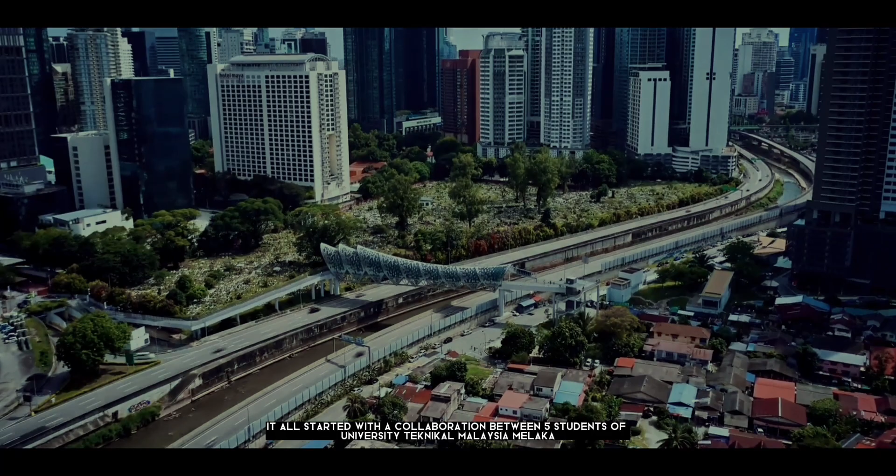This is TANKD Steel Industries, one of Malaysia's biggest group of companies. TANKD Steel Industries are located strategically at Bangsar, Kuala Lumpur, Malaysia. It all started with collaboration between 5 students of University Teknikal Malaysia Melaka who had dreamed of their own company

after completing a PhD in electronic engineering overseas. Thus was formed TANKD Industries, which comes from the names of the students Tanesh, Azmina, Nazan, Khairatul and Dirshan. All of them now are Malaysia's top 10 engineers handling skyscraper projects.

TANKD Steel Industries had a remarkable period of continuing expansion accomplished by a rapid development in Malaysia with collaboration with biggest companies such as Tenaga Nasional Berhad, Top Glove Corporation, Petronas Global, Vibranium Wakanda and many more.

Welcome to TANKD Steel Industries, one of the biggest group of companies. I am Dirshan, TANKD's company manager, and now I would like to introduce my colleagues. First of all is Ms. Wan Noor Azmina, our executive director. Mr. Tanesh is our research engineer. Ms. Khairatul Afika is our material engineer, and finally Mr. Nazan is our technical officer.

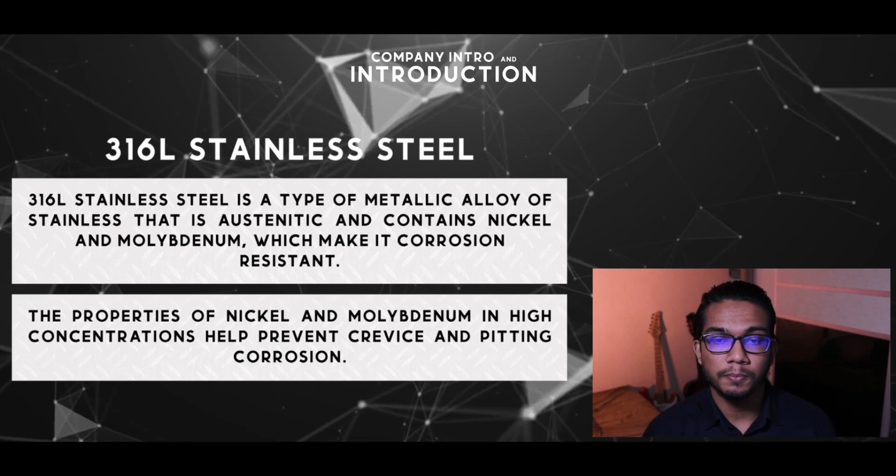Today I'm going to talk a little bit about 316L stainless steel. 316L stainless steel is a type of metallic alloy of stainless that is austenitic and contains nickel and molybdenum, which makes it corrosion resistant. The properties of nickel and molybdenum in high concentration help prevent crevice and pitting corrosion.

316L stainless steel is also very durable and resistant to chemical contaminants and acid solutions such as bromides, sulfuric acid and chlorides. Thus, the role of this stainless steel in the Petronas Twin Tower is to further improve its corrosion resistance, heat resisting properties and formability. Also, it provides a shiny look and strength and fatigue strength to the tower.

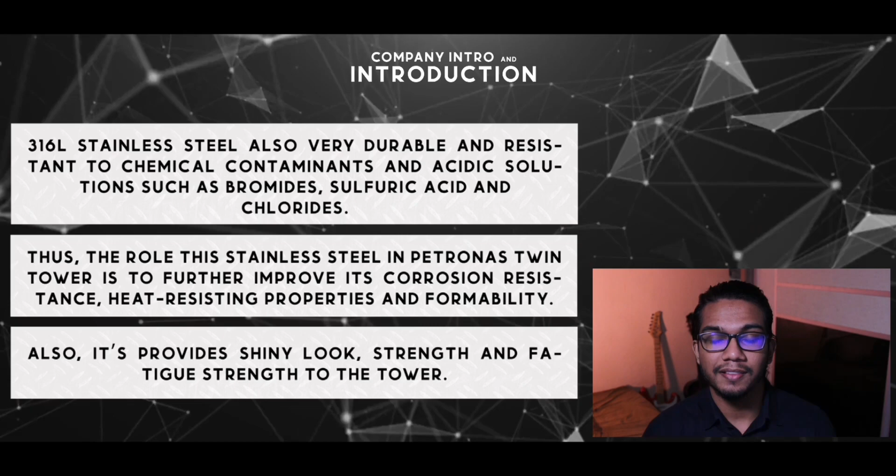Assalamualaikum and hi, my name is Wan Noor Azmina and my position in TANKD Steel Industries is Executive Director. We have 3 objectives. The first one is to provide a better understanding on the properties of the selected 316L stainless steel grade raw material.

We also want to propose better and enhanced mechanical properties of 316L stainless steel for structural application. And we also want to present the technical findings obtained from our company in order to convince the client about the proposal that we make.

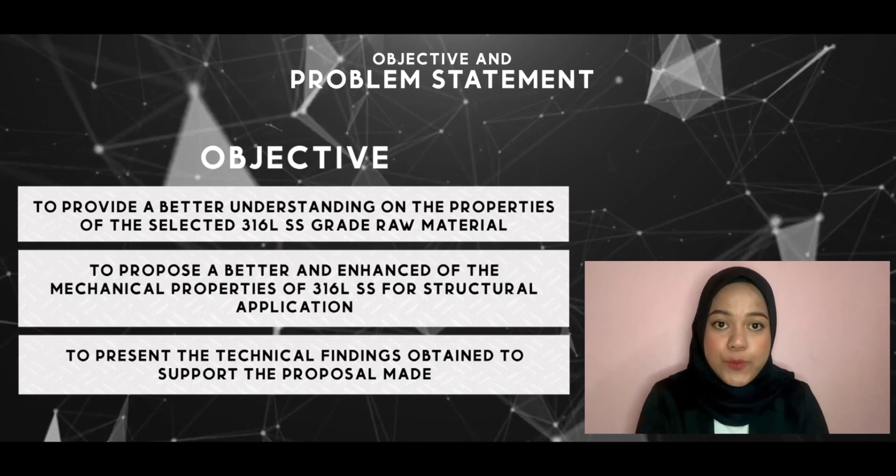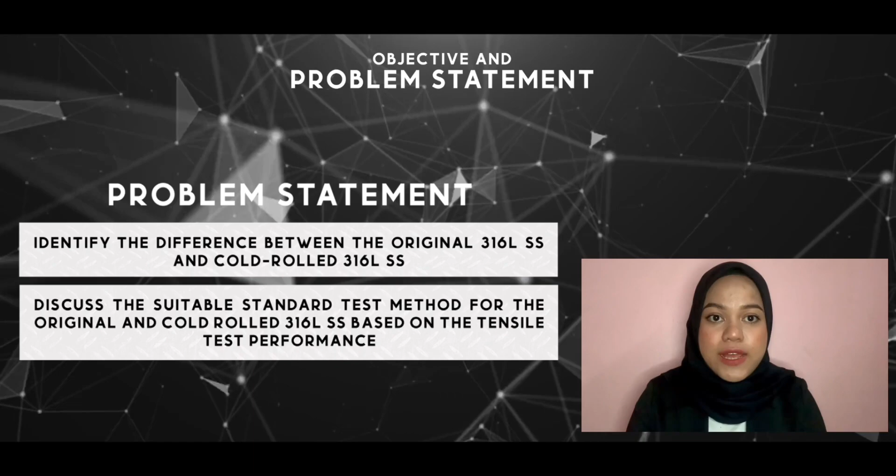Next is the problem statement. We have 2 problem statements. The first one is to identify the difference between the original 316L stainless steel and cold-rolled 316L stainless steel. We also want to discuss the suitable standard test method for the original and cold-rolled 316L stainless steel based on the tensile test performance.

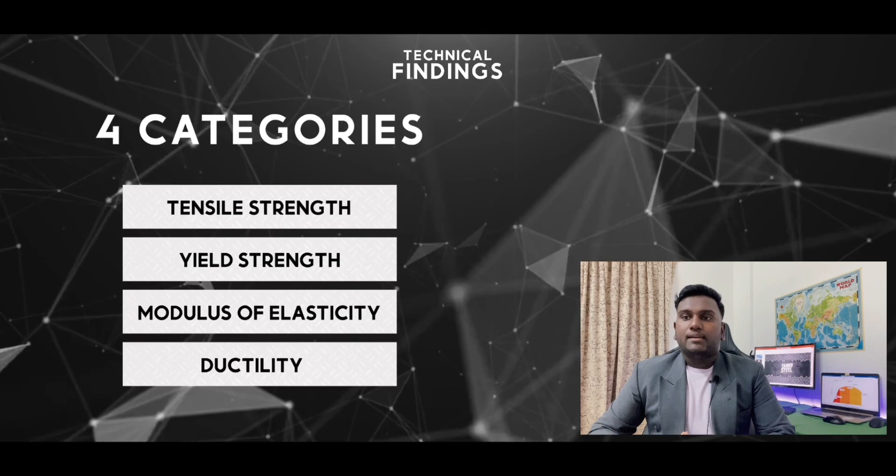Hi, my name is Tanesh Murugan and my position in TANKD Industries is research engineer. For the technical finding, we have 4 categories: tensile strength, yield strength, modulus of elasticity and ductility. Tensile strength is the amount of load or stress that can be handled by a material before it stretches and breaks. Yield strength is the maximum stress that can be developed in a material without causing plastic deformation.

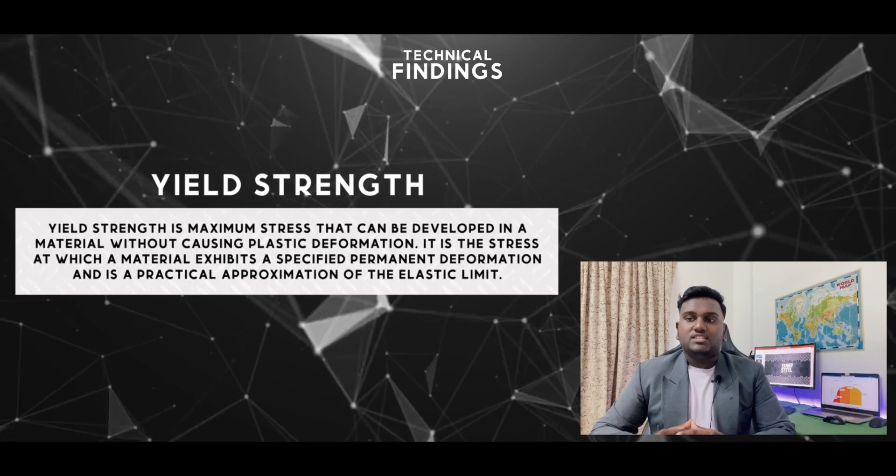It is the stress at which material exhibits a specified permanent deformation, and it is a practical approximation of the elastic limit. Modulus of elasticity is a quantity that measures an object or substance's resistance to being deformed elastically when a stress is applied to it. The modulus of elasticity of an object is defined as the slope of its stress-strain curve in the elastic deformation region.

Then, ductility, a measure of a material's ability to deform before failure. Ductility can be quantified by reading the value of the strain at the fracture point on the stress-strain curve or by doing a % reduction in area calculation. From the data given, we can conclude some of the findings as shown.

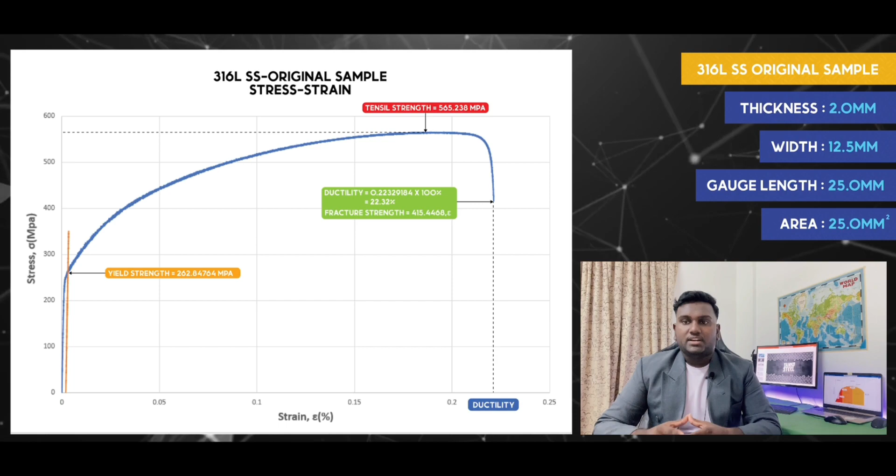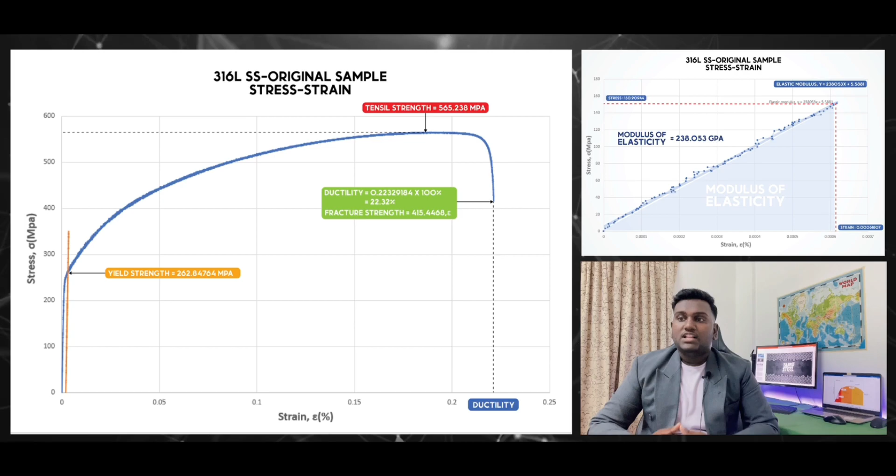For the mechanical properties of 316L as original sample, we have thickness 2 mm, width 12.5 mm, gauge length 25 mm, and the area is 25 mm square. From the graph, we can get the yield strength 262.84764 MPa, tensile strength is 565.238 MPa, elastic modulus is 238.053 GPa, ductility equals to 22.32% after multiplied by 100, and the fracture strength is

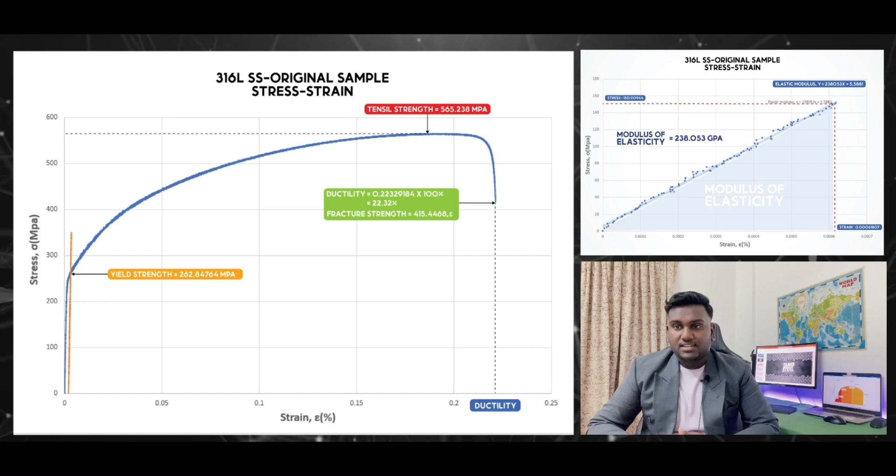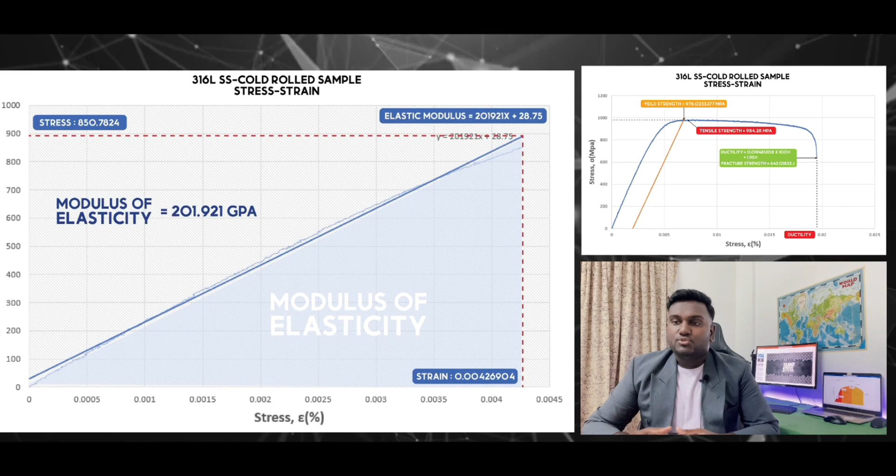415.4468. For the mechanical properties of 316L SS cold rolled, we have thickness 1 mm, width 12.5 mm, gauge length 25 mm, and the area is 12.5 mm square. From the graph, we can get the yield strength 976.0255377 megapascal. Tensile strength is 984.28 megapascal. Elastic modulus 201.921 gigapascal. Ductility equals to 1.95% after multiplied by 100, and the fracture strength is 642.01832.

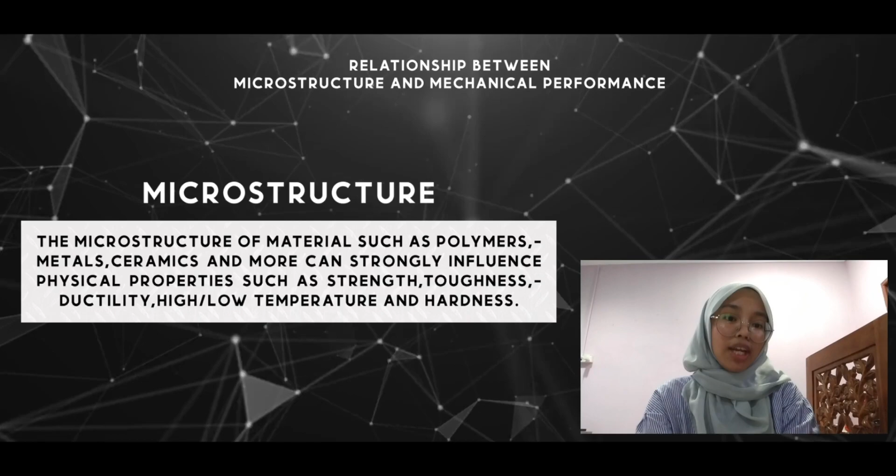Hi and Assalamualaikum. My name is Nurul Khairatul Afika binti Muhammad Suhaimi and my position at TANKD Industries is Material Engineer. So I will talk about the relationship between microstructure and mechanical performance. The microstructure of materials such as polymers, metals and ceramics strongly influences physical properties such as strength and high and low temperature. The mechanical performance is also used to help identify materials and common properties.

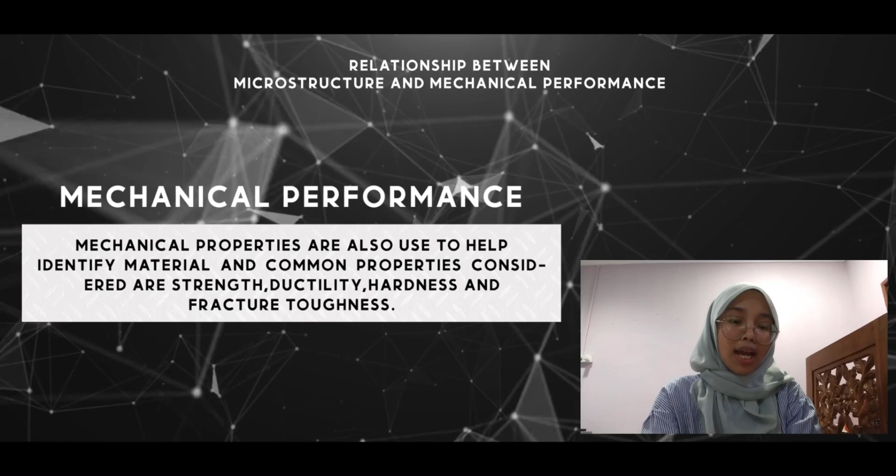For example, the strength, ductility and electromagnetic properties of materials are strongly dependent on the microstructure such as grain size, grain boundary, morphology and orientation distribution of texture. The microstructure features that can be related to the mechanical performance: first, grain boundary phase content, and second, grain boundary phase composition.

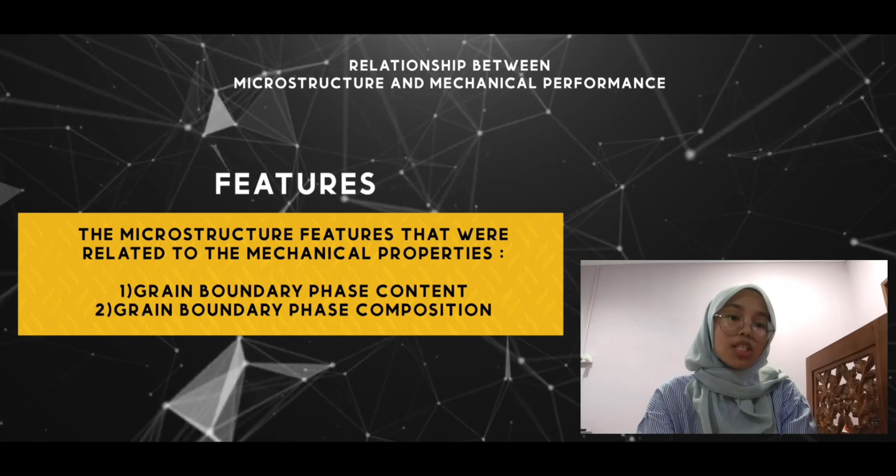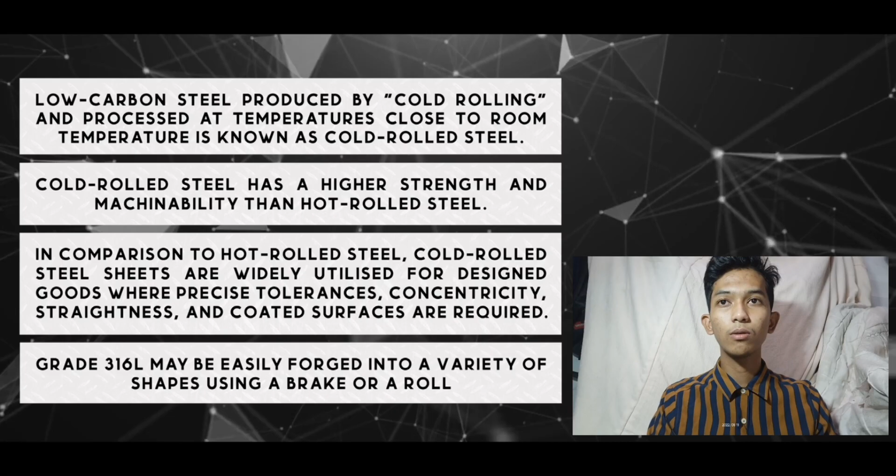316L stainless steel with Gurun process is a highly realistic choice for the Petronas Twin Tower construction since it fits several criteria. For example, it has a superior finish than other grades of steel and is also very corrosion resistant, which is a crucial characteristic because Malaysian weather is often rainy and rust will occur if the material is chosen incorrectly. This is due to the height of the tower, which measures 451.9 meters, very high when compared to other buildings in Malaysia. Therefore, we must choose the very best material.